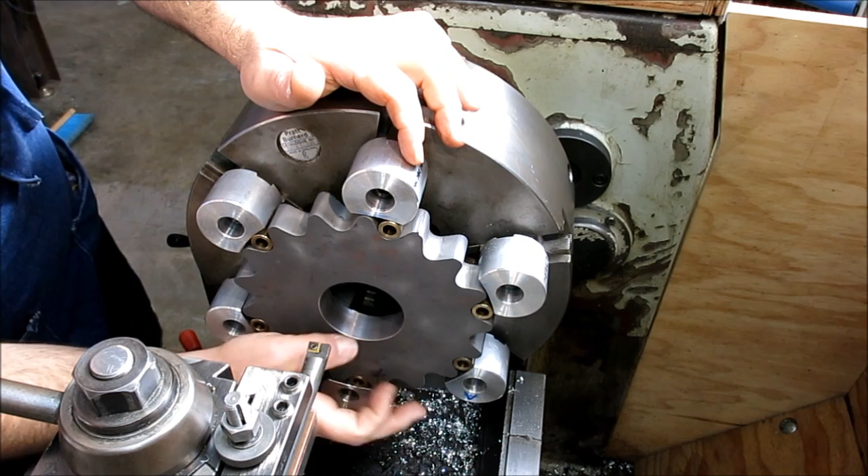Okay, so we're over back on the lathe here. I just cleaned up this bore from the flame cut, so now it's not running out. But now I need to open it up to its finished diameter, which is 3 inches, and we got a little ways to go here, so I'm gonna whittle away at that. I'm gonna calibrate this boring bar here, so we'll take a little skim pass.

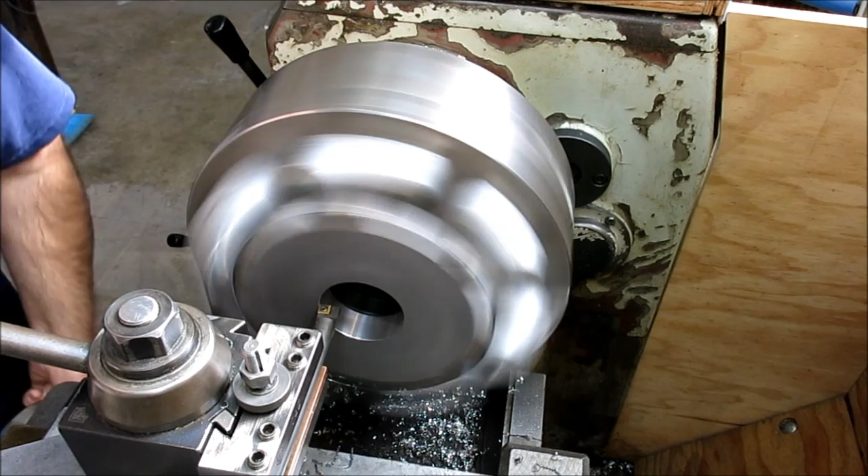All right, Mr. Wizard, put it in gear. Okay, so I'm just touching, I'll take a light pass through there. Feed rate right now looks like about maybe 7 thousandths per rev, something like that.

Now what I want, this is just to calibrate the boring bar. I'm just going to take a caliper dimension here, 2 inches 585. So okay, I already did it, I'm looking up at the DRO right now, I'm already there. So when I get close to my target dimension, which is 3 inches, I'm going to start taking precision measurements so that we don't overshoot that diameter. Okay, so anyway, we'll take a few passes out of here and get to the fun part.

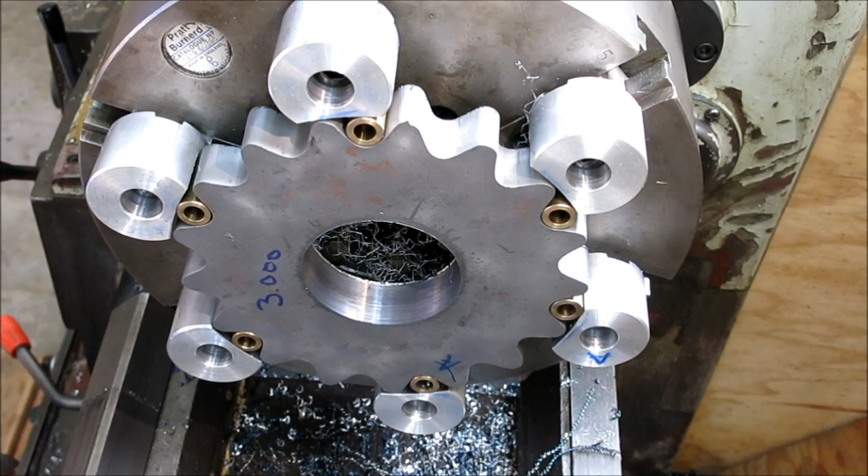Okay, so we switched over to the finer feed. We're pretty close right now. There's about 5 thousandths left, about 125 microns left in the bore. So we're gonna get a good measurement now and see what we got here, an accurate measurement. I've just been using calipers up to this point.

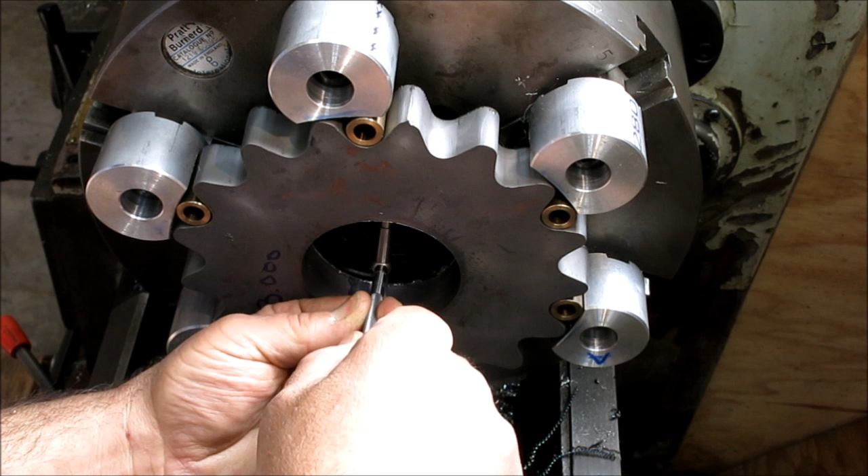Okay, see what we got here. All right, so I'm seeing about 4 thousandths left, something like that. Let's just do it again, just for fun.

So we're using telescoping gauges here, which is a transfer tool. Okay, yeah, 4 thousandths left. So we're transferring this, and then we're using an OD mic to measure over that, which is nice because this is the exact same micrometer I'm going to use to make the male part that fits this.

Okay, so let's take a finish pass on this. Before we were running at 7 thousandths per rev feed rate for roughing that, which is 0.18 millimeters per rev, something like that. And now we've switched to about 4 thousandths per rev, okay, roughly half the previous feed rate, which is 0.1 millimeters, a tenth of a millimeter per rev.

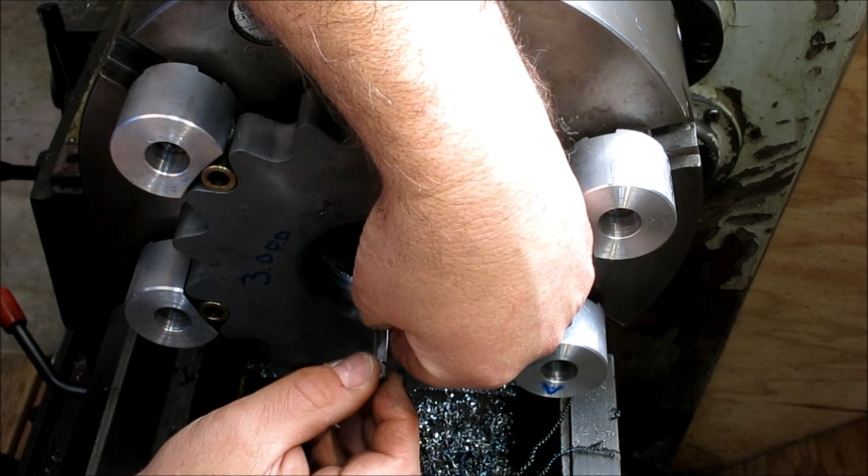Oop, I like that one. Okay.

Hey! Ernie the shop dog's snorfing at somebody out there.

Okay, yeah, I think we're done. I might take a little paper in there after I break these edges and just polish it up a bit. Okay, so that's about it. Now I can get this out of here and get my lathe back in normal jaw mode and do the male part.

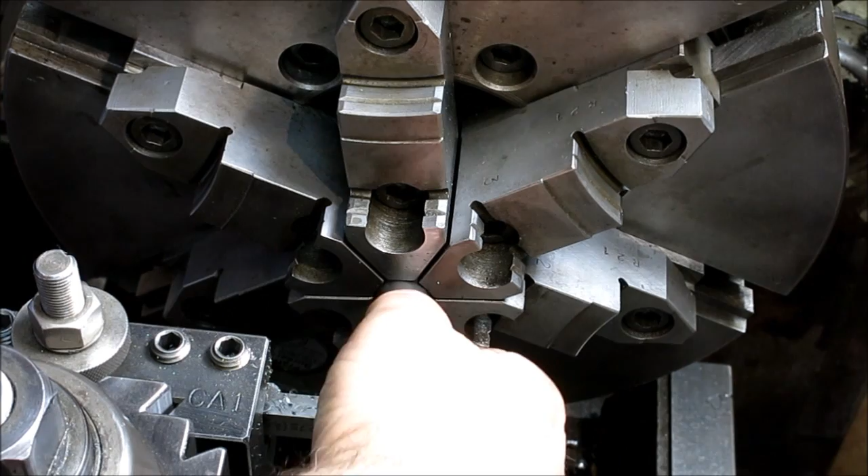You know what I ought to do? Yeah, that's what I ought to do. Might as well use the lathe, eh?

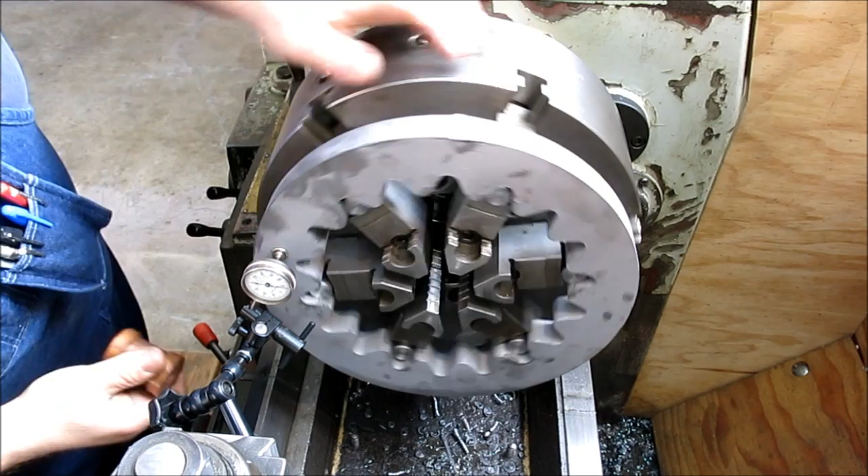Let's try that. Let's get the bigger one out here. Oop. All right, Mr. Wizard, quit hitting the indicator.

That may be about as good as I can get on this. I'm going to turn the OD here. I'm not doing anything on the inside, I just want to get rid of this flame cut OD here. That's about 8 thousandths total, but it's got some bumps in it too, so.

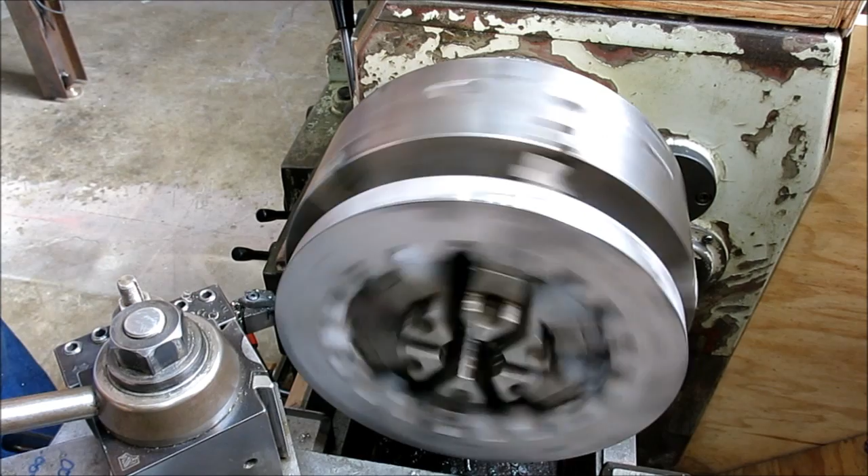Alright, so I'm going to do most of that off camera. It's pretty boring watching it. You can see that I've got it set up on the pins here, like what we did with the input gear, except that on this one I'm able to use the regular jaws on the chuck. Okay, so that's the difference on this one.

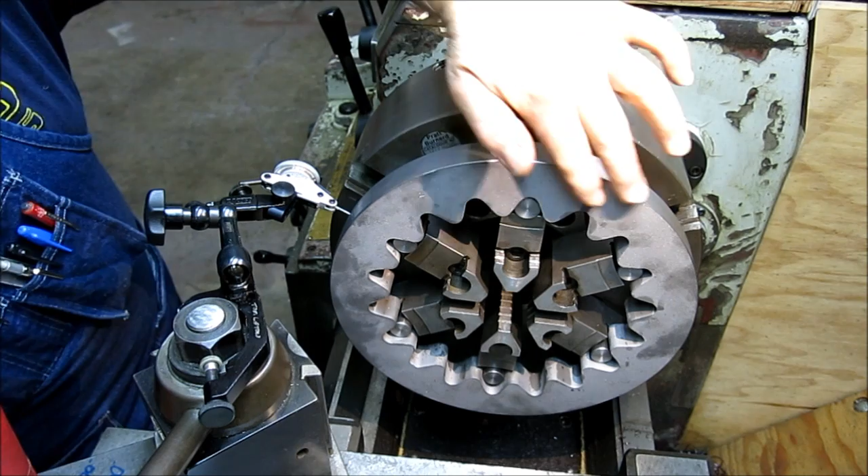Okay, so I turned the OD and I faced one side here, and now I want to face this side here. Parallel with the face that I just faced. Anyway, so what I want to do is I want to indicate on that surface there.

It's actually pretty good. What do we got? It's about 1 thou right now. Do I even want to mess with it? Let's see, so that's a low. Let's just see what we can do here.

I'm not really changing it much. Maybe I'll try to bop out the quote high here. That helped a little bit.

Okay, so I got it indicated good enough. I'm going to use two tools on this - a roughing tool and a finishing tool, because I have an interrupted cut here. I want to get it nice and flat to start with, get this scale taken off, and then I'll come back and take a couple thousandths of an inch off to produce a real good finish. So let's go for it here.

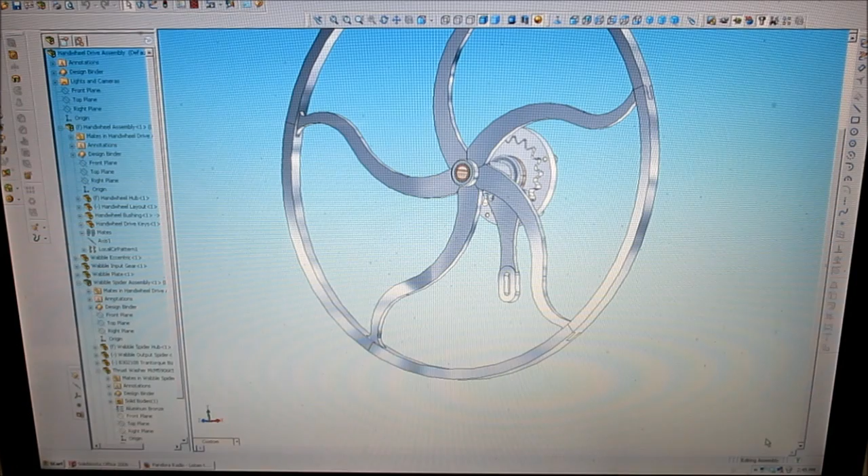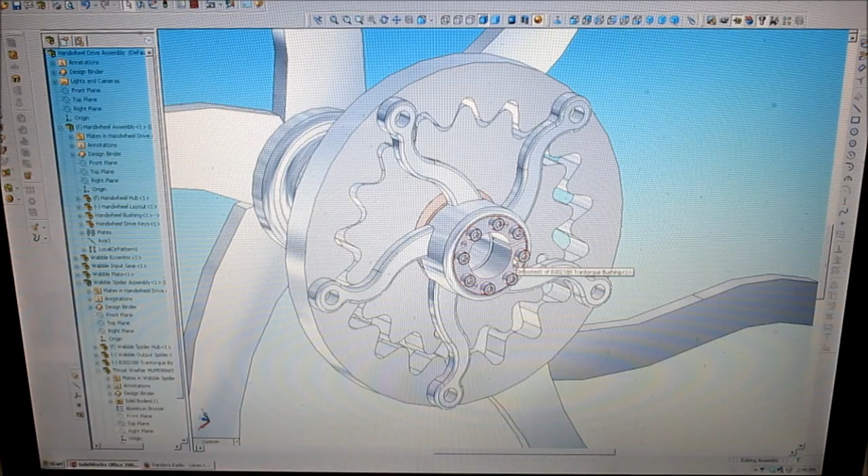Okay, so here's the model of the etching press drive system, and here's the hand wheel - you guys have seen that, right, and plenty of that. And then here's the stuff we're working on now, this wobble drive system here. This is the gear that we bored in the soft jaws. And then this one here, we're going to turn the OD, and then we'll face this surface here.

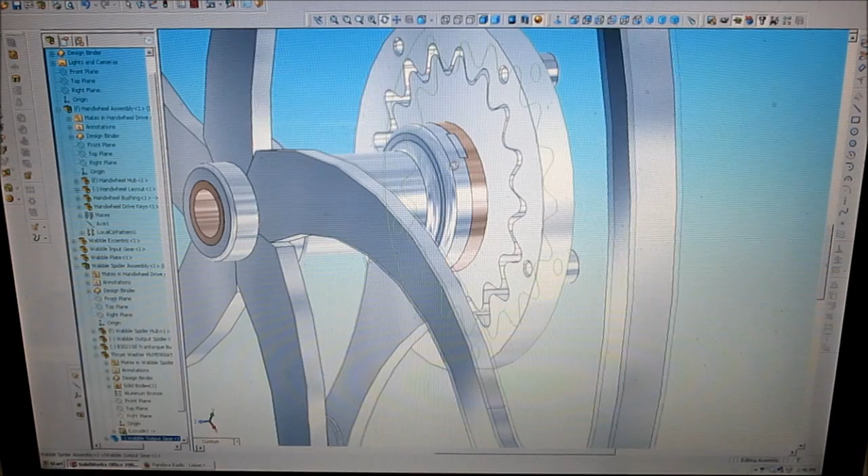Let's see, and then coming up here is this guy in here. This is a bronze eccentric, and I'll just pop over and show you guys that one real quick there - that's what that one looks like. So that'll be a fun one there. That's made out of bronze, and it has this offset in it, which will be kind of fun.

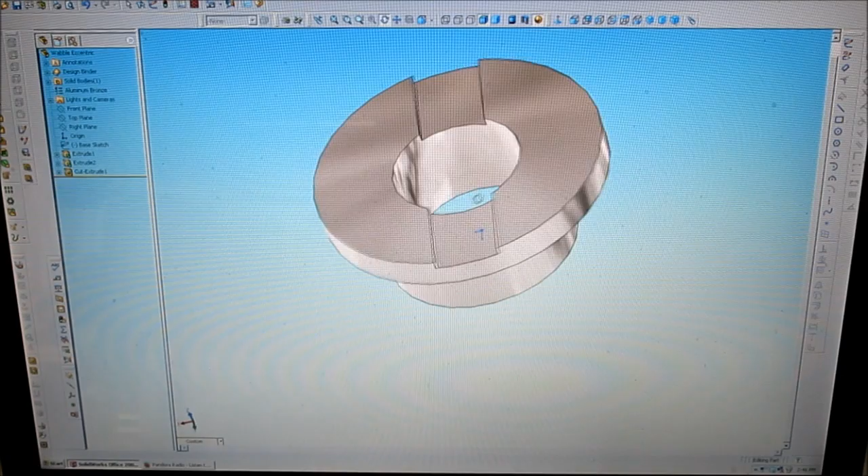And then this face key here to do the driving. Okay, let's see what else. And then, let's see - this will come later on. These arms here and this hub - this is a whole other little assembly here. So that'll come later. We'll probably do this guy right here after that.

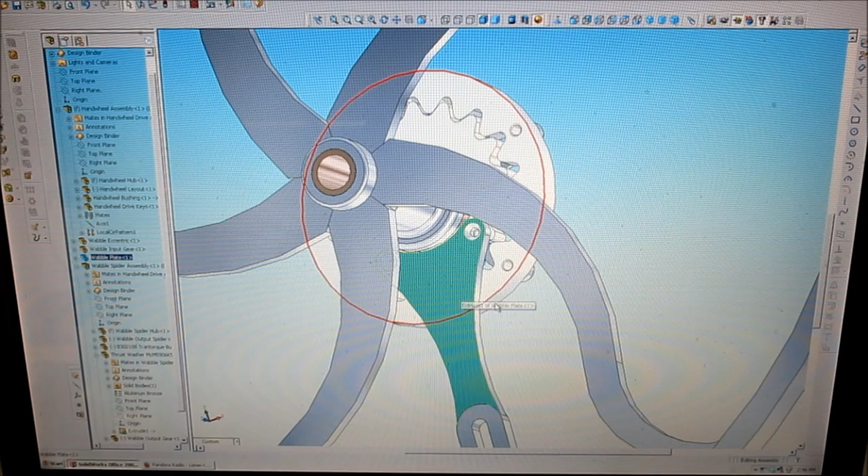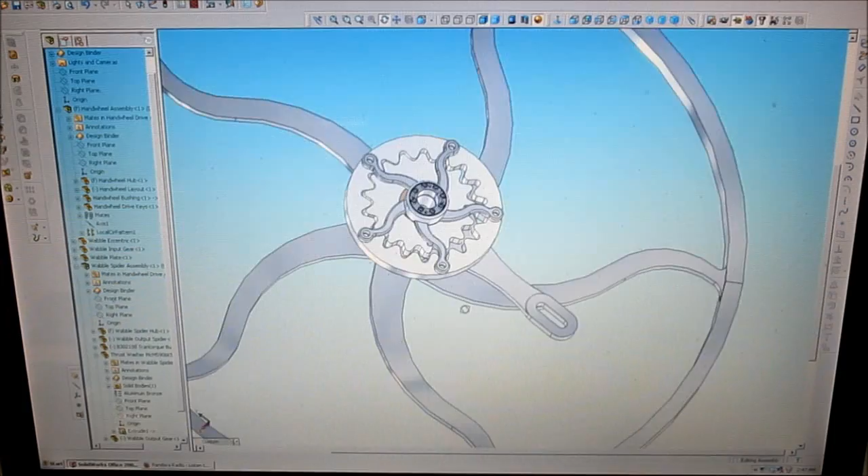This is an anti-rotation arm that moves up and down a little bit, and it rides on a catch pin down here. And that piece there is going to be made out of bronze or brass, something like that. I've got to scrounge up some material for that. Anyway, thought you guys might like to look at that, and kind of see that whole thing and the layout of this guy.

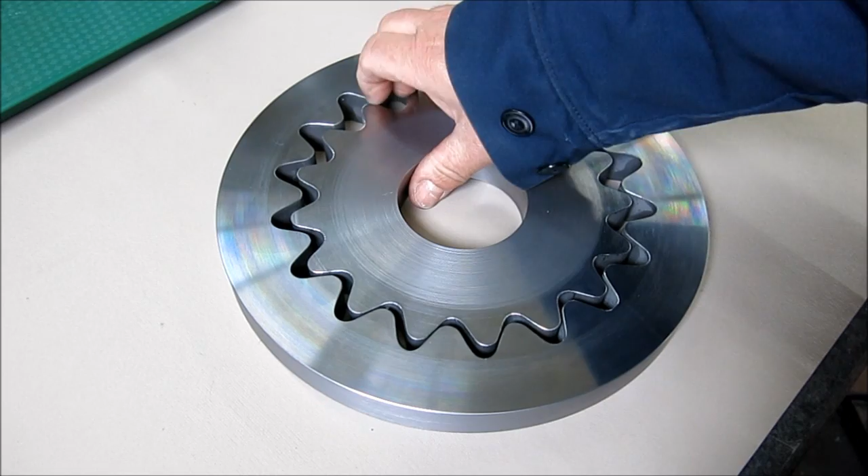All right, so there they are, faced and bored and turned, and ready for a little bit of mill work. There's some holes that need to get added to those, so that'll be the next one. Thanks for watching.